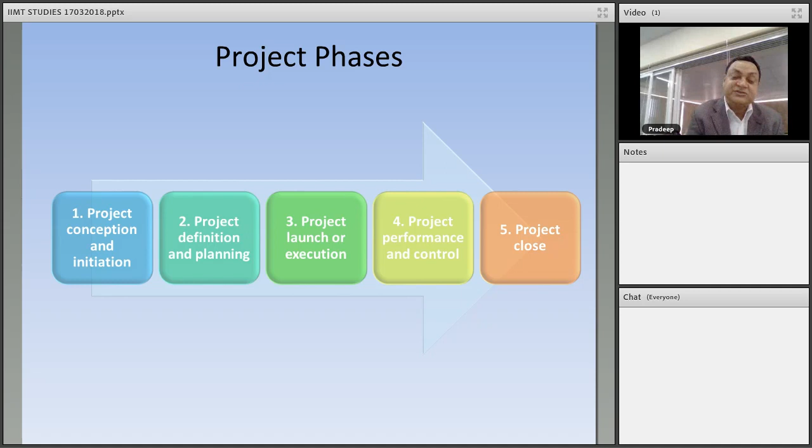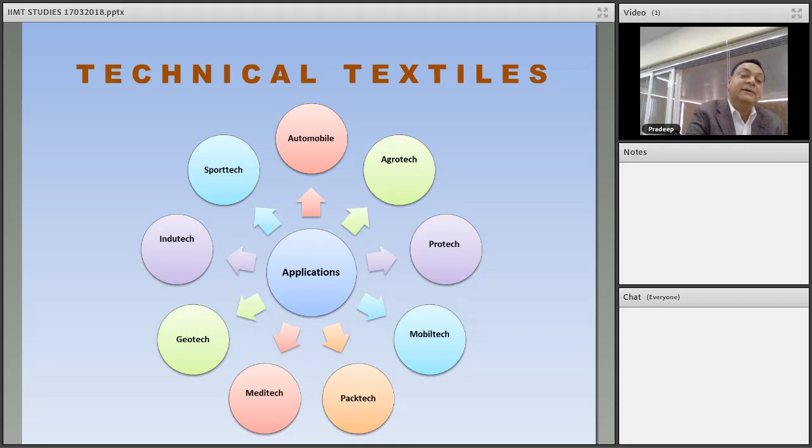Now I am coming to the subject of technical textiles. Basically, technical textiles has 12 segments, but the important segments with more demand are automobiles, agrotech, protech, mobiltech, then packtech, meditech, geotech, indutech, and sport tech. I will go in details on each one in the next slides.

If you see the automobile textile industry: auto hose fabric, automobile interior carpets, automotive airbags, car upholstery, car body, even bulletproofing of cars - everything comes under technical textiles. There is a lot of scope in this industry.

If you go on geotextiles, we can see geogrids, geomats, geomembranes, geonets, non-woven geotextiles. There are many items which are daily required in the construction of the geo industry, and they are rapidly used now, even in India, in mass quantity.

Then medical textiles - a lot of contribution from medical textiles. Suppose baby diaper, bandages, contact lenses, gauzes, gowns, incontinence diapers, masks. For mask, I am giving one example of an institute, Atira. Around 6-7 years back, swine flu fever came, and no mask was working properly, and the impact was much more of the swine fever. It even led to the death of people.

So Atira invented a mask guaranteed for 99.9% breathing, and it has worked very well. They distributed this mask free of cost for social welfare. So there is a lot of contribution in medical textiles.

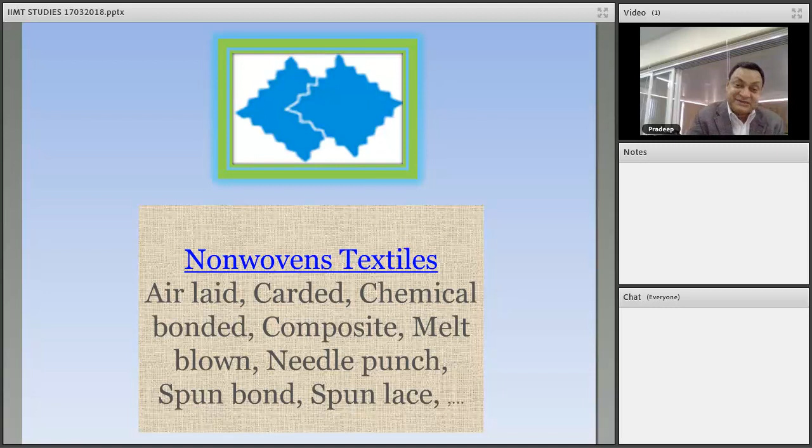But since this technical textile has come, there are some processes which I will show you in the next slides. The value addition on non-woven has been increased, and people are engaged for the whole year in the factory.

Now, if we go on Oeko-Tech textile, we have to see the industrial hazards, waste disposal products, the concept of green dustbin and blue dustbin. Other Oeko-Tech applications come under the Oeko-Tech industry.

Then agro textiles: agro bags, anti-hail nets which prevent crop damage, bale wrap nets, bale twine, bird protection nets, crop nets, fish linings - this comes under agro textiles. So you can say there are a lot of items which come under technical textiles. So one person has a lot of scope to start a business based on his attitude as well as requirement in a particular area.

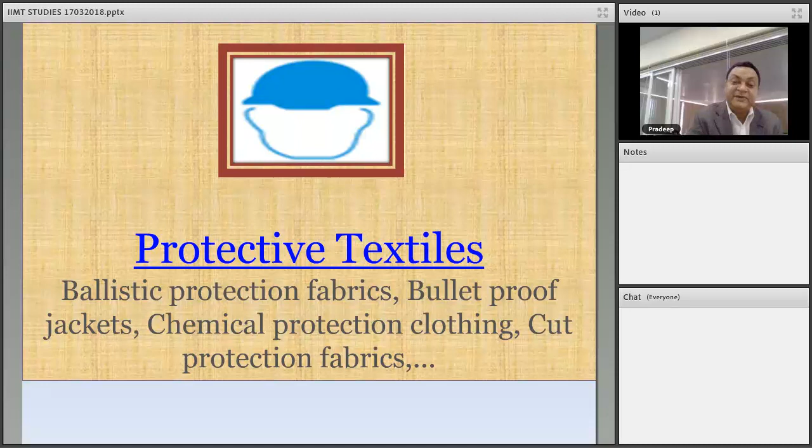Now, protective textiles - there is a tremendous contribution of protective textiles. You can see the chemical industry, defense, ballistic protection fabrics, bulletproof jackets, chemical protection clothing, cut protection fabrics. Suppose people are doing some cutting business with a knife - they have hand gloves so the organ cannot come in contact with the knife.

Then packaging textiles. As I told you with non-woven, packaging textiles saw a huge revolution with the introduction of lamination and coating. After lamination, we can give value addition to non-wovens. Then we can laminate them with BOPP, biaxially oriented polypropylene. Then we can print on it, and it will become export quality bags as per requirement.

Then clothing textiles - these are mostly narrow fabrics: elastic narrow fabrics, hook and loop, tape fasteners, interlinings, labels, sewing threads, shoe components. Here I want to add one thing - if we are talking about narrow fabric, it includes rope and belt.

Previously, ropes came in conventional form by just braiding - three or more fibers interlaced together, producing the braided rope. Now rope can be made by weaving also, with core and sheath arrangement. Core is the inside material and sheath is the outside material. Because of the core, strength of the rope can be ascertained, and because of the sheath, aesthetic property like handling of the rope can be ascertained. Suppose inside we put carbon, so strength comes because of carbon, and outside we put cotton, so we can hold it properly with naked hands, no problem.

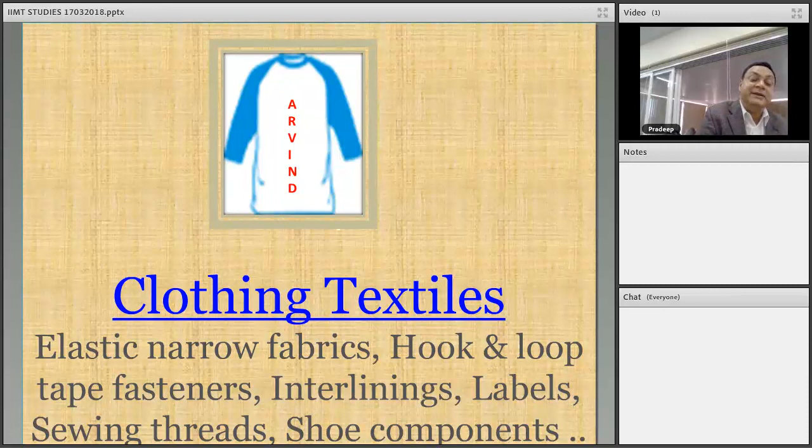So this is rope, then belt. There are several belts we are using - industrial belts, and there are woven belts also.

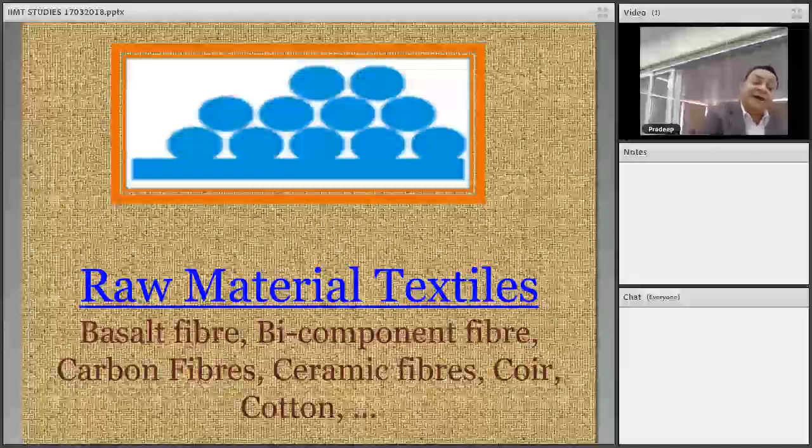Then raw material textiles - basalt fiber, bicomponent fiber, carbon fiber, ceramic, coir - these are raw material textiles. Then sport textiles - there is good contribution in the sport industry also: artificial turf, ballooning fabrics, boat covers, climbing ropes, as I told you before, paragliders, parachute fabrics, sail nets can be made by sport textiles.

Then building textiles - architectural membranes, awnings, canvas tarpaulins, concrete reinforcement. These are the main products and they are usually in production under technical textiles.

Then home tech textiles - carpet backing cloth, this lino cloth I will show in the next slides with polyester. Then curtain tapes, fiber filter fabrics for vacuum cleaners, furniture fabrics, etc. - we can make these in home tech textiles.

Industrial textiles include abrasive fabric like sandpaper, absorbent glass mats, battery separators, bolting cloth (a thick cloth that can hold and have bolts fitted for separation), and cigarette filters. Coating is also done by industrial textiles.

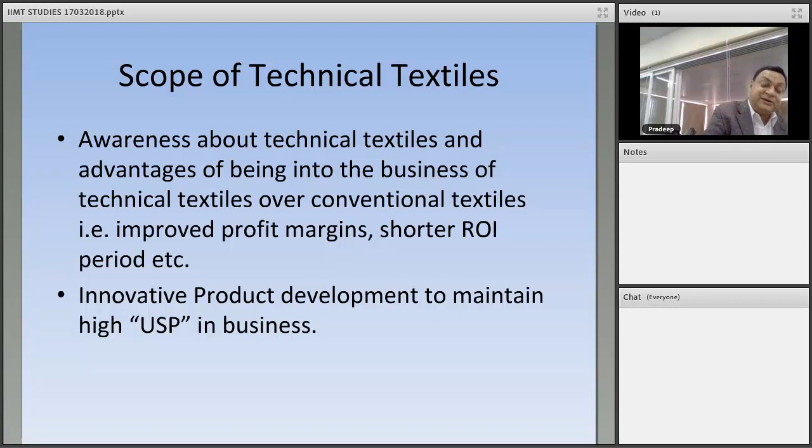Now let's see the scope of technical textiles. You've seen the list of products, but this is just a small sample; we can expand it much further. Technical textiles have much more scope, and depending on the requirements of a particular field, an entrepreneur can start a business. One can do this business discreetly and maintain a high unique selling proposition. If the USP is good, the profit margins are higher and ROI can be shorter. So this business is very effective and profitable.

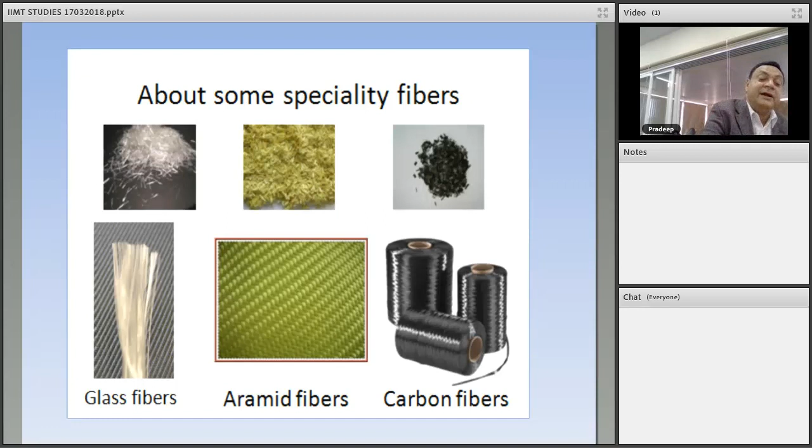Now, the basic yarns used in technical textiles are glass fiber, aramid fiber, carbon fiber, and their chips. Dyneema (aramid-type fibers) also come into use, but that is rare. Some companies making these are DSM, Teijin, and DuPont.

That was the description of the products. Now let's talk about technology. In textiles, there is a process of combining the warp yarn and weft yarn according to the fabric construction. There are eight weaving methods that can be used to generate technical textiles.

I will first talk about the names of the weft insertion methods, and then show the looms in the next slides.

One is projectile technology, where the weft yarn is transferred by steel projectiles. Then there is rapier technology, where the weft yarn is transported by giver and taker rapiers. This rapier may be flexible or rigid depending on the variety of fabric being produced.

Then there is water-jet loom technology, where the weft yarn travels by a jet of water—mostly used for making polyester. Then air-jet technology, where the weft yarn travels by a jet of air.

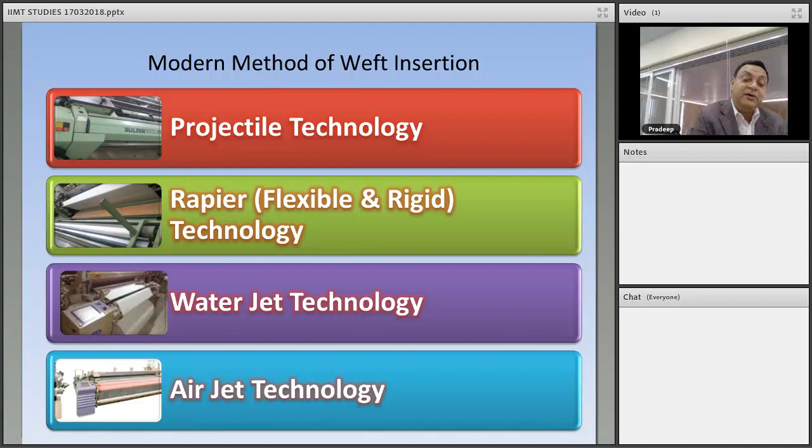Then multiphase weaving technology, which uses a circular type or flat weaving machine, where several sheds of warp and several wefts can be inserted. Then multi-axial weaving technology—multi-axial fabrics are required for strength, so we use multi-axial weaving for that.

Then further processes like lamination and coating, along with weaving machines and embroidery units. Everybody knows embroidery, and there is a lot of scope in embroidery and decorative fabrics.

Then needle weaving technology for narrow fabrics and ropes—these use narrow looms. There are some local, indigenous looms, but the main looms were initially made in Switzerland, such as the Jakob Müller belt narrow loom and the Jakob Müller rope narrow loom. With these, we can produce several types of ropes and belts.

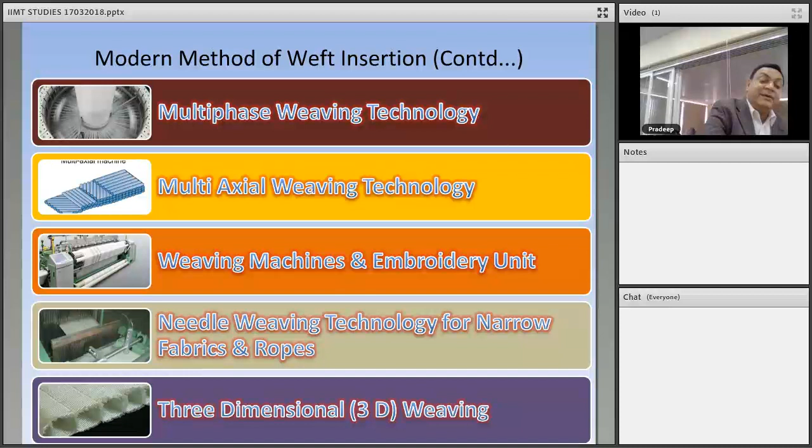Then there's three-dimensional (3D) weaving, which has a lot of significance and use, mainly in the automobile industry, aeronautics, and other industries.

Now let's look at the Sulzer picking mechanism, where the weft yarn is carried by a projectile. A projectile is made of a small cross-section of steel, 90 mm long, 14 mm wide, and 6 mm thick. Several projectiles travel through the shed carrying the weft yarn to make the fabric, and a shearing strain energy gives the force to the projectile so that picking takes place.

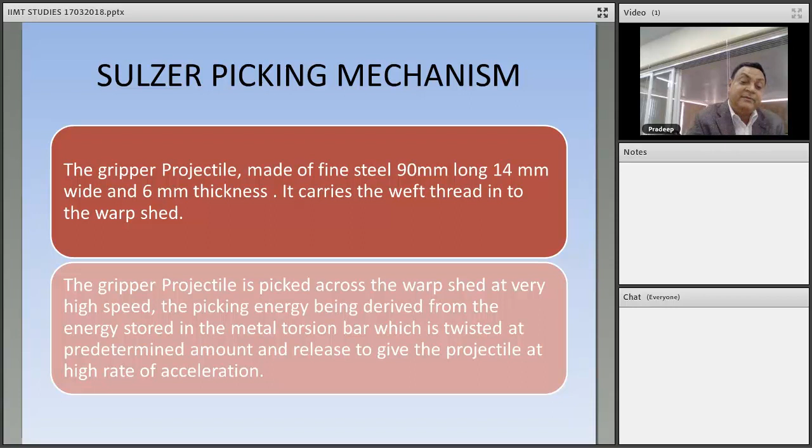This is a good mass production loom. Let me show you a weaving process on this: polypropylene ventilator fabric being woven on a Sulzer projectile weaving machine.

Shuttle looms were very good earlier, and even now they are still used. But since microprocessor-based control looms have come, we get more information, so shuttle looms are used less now. However, for particular segments like heavy fabric, we still use shuttle looms.

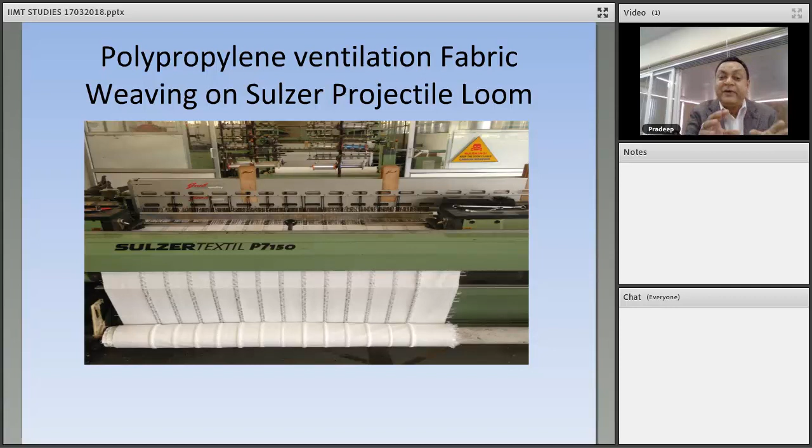Like you can see in this polypropylene ventilator fabric: here's the fabric, here's a slot, here's the fabric, here's another weft slot. So if you make a carry bag from this, it will be perforated. If you transport fish from one place to another, you can carry live fish in the fish industry. If you want to transport fresh vegetables like tomatoes or potatoes, putting them in this bag lets them get very good oxygen. That's the advantage of this ventilator fabric.

We can make many things like this, and mass production is required for such fabrics.

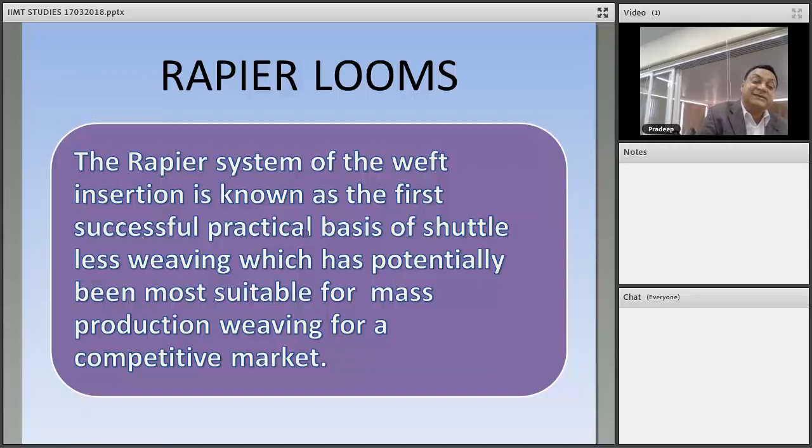Then rapier looms, as I told you. The rapier loom system is known as the first successful practical basis for mass production. This rapier is transferred by two grippers, one giver and one taker. The rapier runs from one side, brings the thread, gives it to the other, takes back, and beat up takes place. Consequently, fabric is produced according to design.

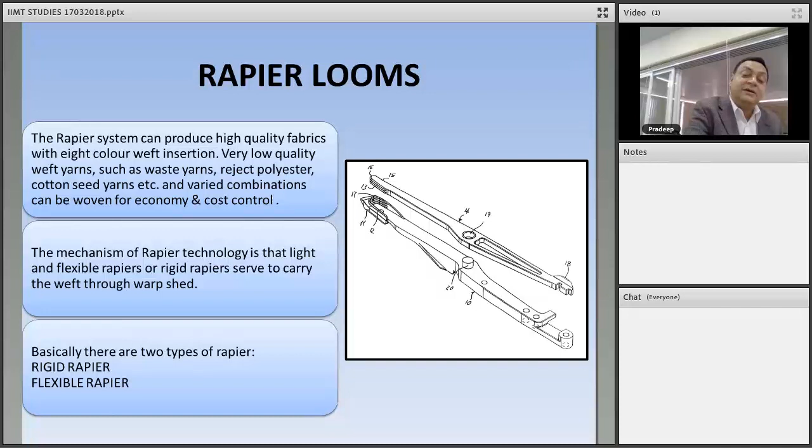What we feed in the dobby looms, or maybe in microprocessor methods like this, and jacquards. So the mechanism of the rapier is very easy and these looms are very productive, and mass production can be taken from these looms. Even any type of yarn, even waste yarn, can be run very smoothly by these looms. The demand for rapier looms is highest this time for technical textiles.

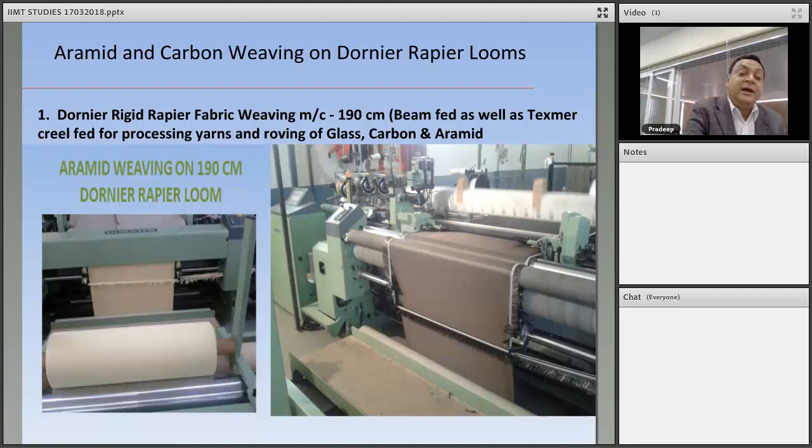Now I am showing you here the carbon weaving and aramid weaving on a rapier loom, Dornier rapier loom. On this loom we are making the carbon fabric. You can see here the special arrangement - there is no beam for carbon. Straight threads are coming and they are just making the fabric. And this carbon is very dangerous for the health of those producing it.

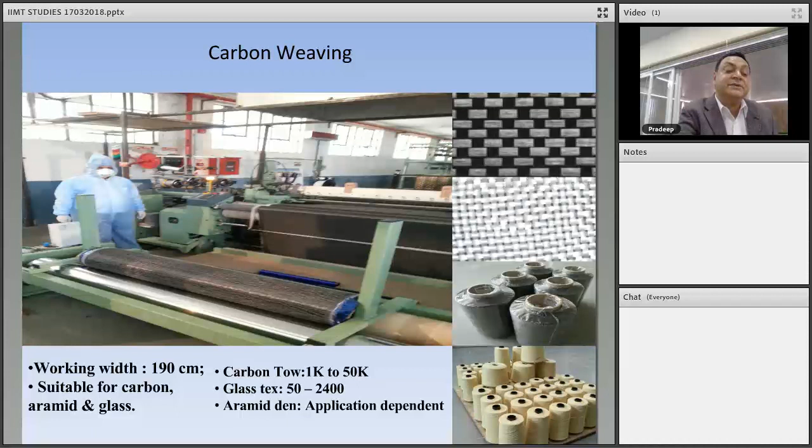I'll show you this in the next slide, then come back to this one. The person operating this machine wears protective dress so the carbon fibers should not touch their body. They even use a face mask, specs, gloves - everywhere is covered. So protection is very important.

And if you see this carbon weaving, here you see this particular tilted fabric being produced. This is called satin carbon fabric. This is useful for niche segments like aerospace aeroplane parts, tilted parts like the propeller of the aeroplane, where this type of fabric is used. This is costly carbon actually.

3K carbon, 6K carbon is the nomenclature. In other varieties of carbon, 24K, 50K carbon is used basically in the construction industry - I'll show you later in this slide. Then there is UD carbon and BD carbon. BD carbon is bidirectional carbon, meaning the yarn of vertical and horizontal, warp and weft, will go in equal ratio, or 60-40, or 70-30. While in UD carbon, strength comes from warp yarn, the longitudinal yarn only, and weft yarn is used just for interlacement. So weft yarn remains only around 10% and warp yarn is 90%, because weft yarn has no role in the strength - it's just making the fabric by insertion.

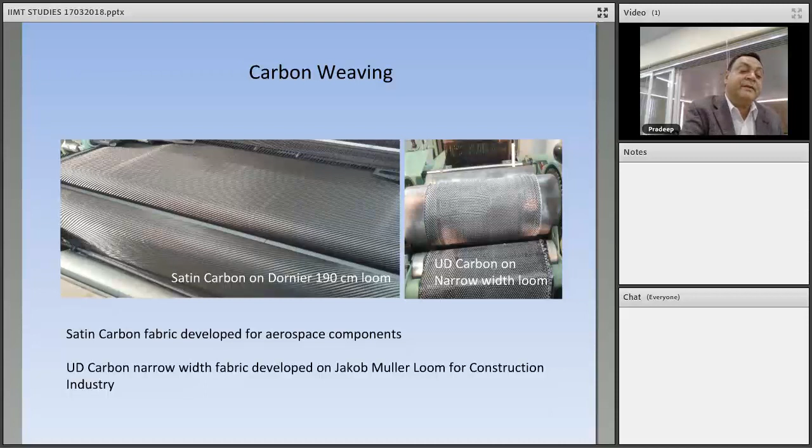I'll show you this in the application. This is a Jakob Muller weaving machine from Switzerland. This is a Dornier weaving machine of Germany. These are most widely used in the industry.

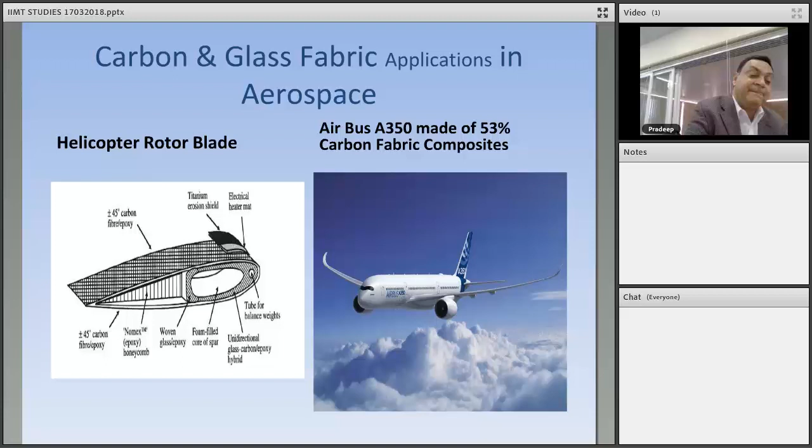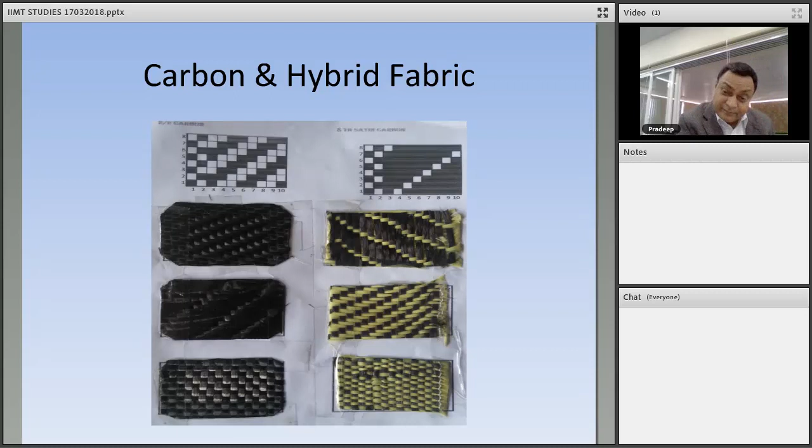Around 10 years back we were using square pillars. Now builders are making round pillars also. So these square pillars, with time, say 50, 60, 70 years, because of the load and compression, the extremities of the pillar just start damaging and coming out.

You can see, just imagine a building. If the building stands on 4 pillars, you can see on the extremities there are some injuries, materials coming out, and this building becomes risky. It may fall down anytime.

So without removing the total infrastructure, we can repair the pillars. How? This is a carbon fiber which we made on a narrow machine, the 24K, 50K carbon, not very costly. It comes around 2200 rupees per kg, like this price.

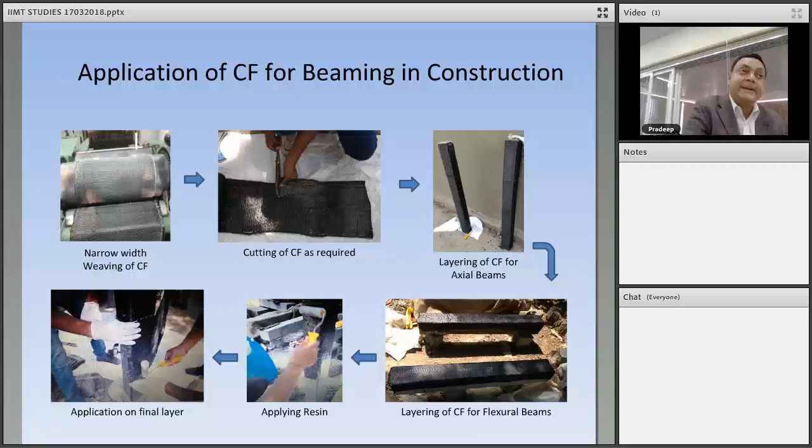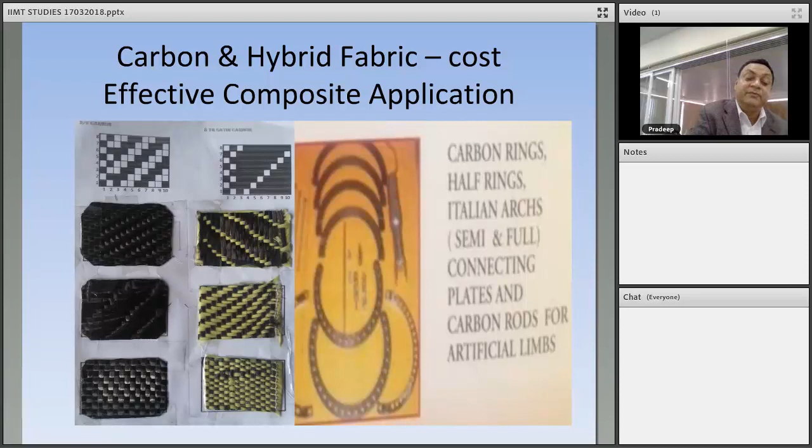We can make carbon rods for civil construction and artificial limbs in medical science. Carbon wearing is very less, abrasive very less. So it is now adopted firstly in medical technology also, mainly for artificial limbs. They are making it. So this is a good contribution of carbon technology in the medical field.

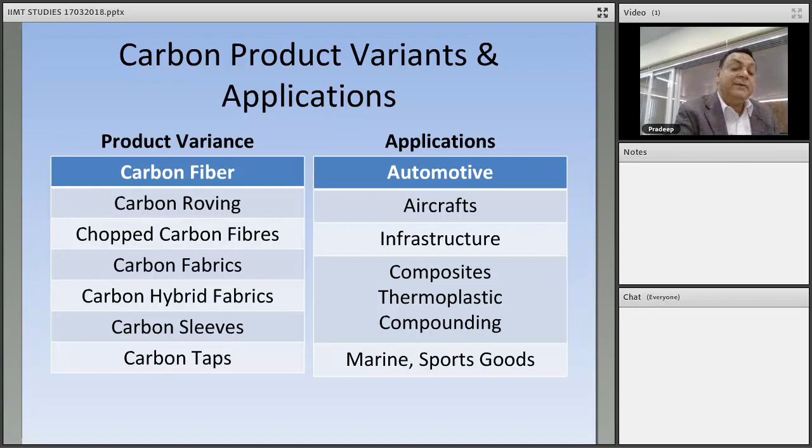There's a lot of scope there. These are some very small examples I am giving you. This is a very vast field actually, and we have a lot of applications of these things. Even research is in progress, on how we can make more utilization of this technology in future.

Now I'm coming to glass fiber. As I told you, carbon, glass and aramid in the beginning. Again, we are taking the Dornier loom of Germany. Now you are seeing here two types of fabric: one is fabric-like fabric, the other is perforated fabric. So this fabric, suppose we are making PPGL, polypropylene and glass blend.

Then you see here, this is leno fabric. If we talk about leno fabric, the perforated fabric: 10mm by 10mm leno, 8mm by 8mm leno, or we can have 6mm by 6mm leno. These are symmetrical shapes. Even you can take 6mm by 10mm leno, 6mm by 12mm leno, asymmetrical shapes in polyester or glass.

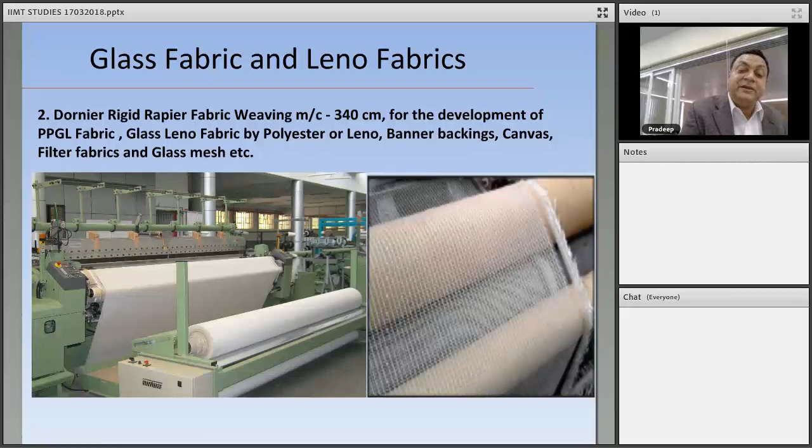Even in Uttarakhand and the northeast, the roads were totally deforming during the rainy seasons. Now they put this fabric, polypropylene fabric, leno fabrics, so now roads are stable. So in the construction industry and even the bridge industry, there is a lot of scope for this leno fabric, glass fabric.

So this is very important: how to select the machine for a particular task, and what are the future prospects of the business.

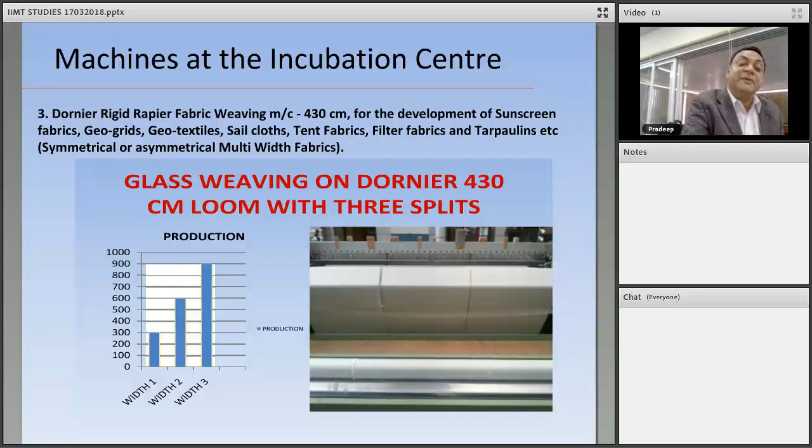Now, lamination and coating machine. Lamination is a process adopted since 1800 BC. If you see that time, with mummies, they were preserving dead bodies - that was one type of lamination or coating. Many people have been using this, but nobody knew the much importance of it. But in the last 20-30 years, this has been adopted very quickly.

It's used for preserving things, giving strength, and giving value addition to material - like automobile textiles, protective textiles, bulletproof fabrics, bulletproof jackets for military and police, medical textiles, aprons that should not catch germs. Suppose they make polyviscose fabric and put coating on it so germs don't come into the intensive care unit. Then industrial textiles, sport textiles, fashionable wears - suppose there is denim fabric, they can join two denim fabrics to give a fancy effect and make a coat. Then home furnishing fabrics.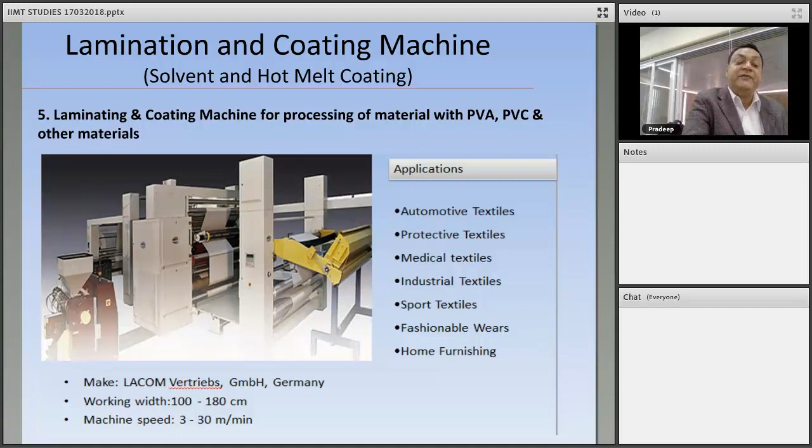Now this is the preform for bulletproofing jackets. Preform means this is the initial material for a final object. Suppose I have to make one preform for a bulletproof car - I'm giving the example just roughly.

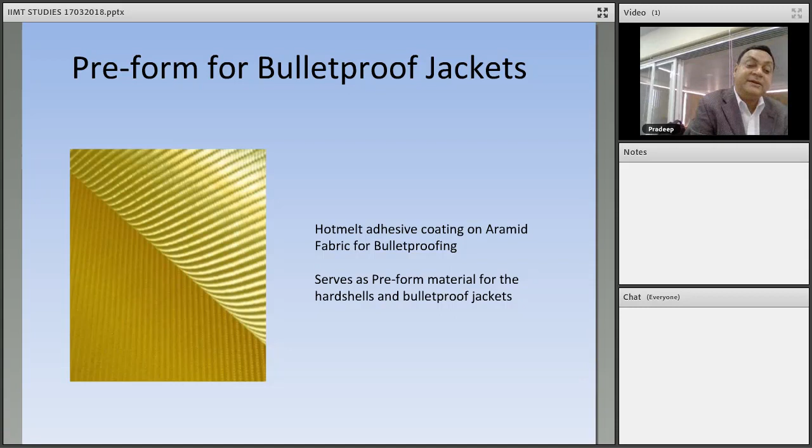So this bulletproof car material is very costly. They take a biaxial aramid fabric and put AOPP coating on both sides, 50-50 gram. Then they send this fabric to the forensic laboratory. For a requirement of, say, 6 bullets, they shoot from a particular distance with a particular size gun, 6 times fire. If it doesn't show any hole or impact on the fabric, it's passed - otherwise it's not passed. So making this fabric is not easy, and it should be 100% foolproof before giving it to the user. This technology is slightly complicated, but we use it even in India.

Now you see a very easy technology - non-woven fabric. There was a time when the scope of non-woven fabric was gone and people were afraid to bring non-woven machines. But now, since this value addition concept of non-woven has come, we are increasing production in this industry.

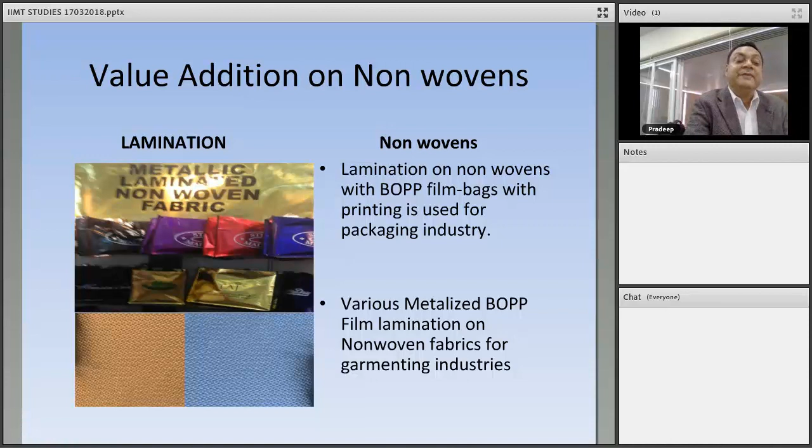Suppose this is an example: we take just fabric, we take the film - golden color, silver color - we laminate it, then do printing. We can make very good poly bags, even export quality bags people are making in India. So this is the application.

Now I was talking about weaving. Now I am coming to braiding technology, because technical textiles are possible by weaving, braiding, knitting, and non-woven - 4 things. Weaving and non-woven I have covered. So if you have any question, you can type here, or after this presentation we will be comfortable to solve any questions.

Let me continue with the application of braiding technology. I defined braiding earlier. The demand for different technical braids keeps pace with technical progress. The medical industry, automotive industry, aeronautic industry, even satellites and space application centers - they all require braided fabric, because knitted and braided fabric has more strength than weaving. Suppose one person makes perforated fabric, which I told you earlier - leno fabric, on weaving - it can be used on tiles or road bridges for giving strength to the bridge.

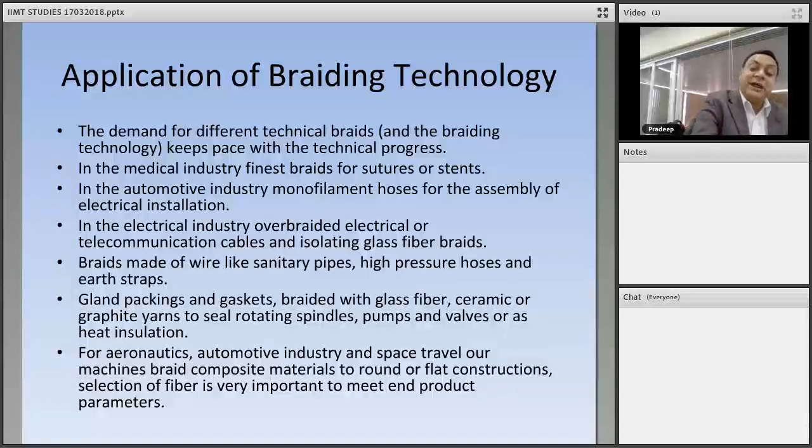In automotive industry, monofilament hoses are used for the assembly of electrical installations, the electrical industry, overbraid electrical and telecommunication cables, isolating cables, and fiber braids - these are the main applications. Then there's gland packing gaskets, braids in glass fiber, ceramics, and graphite, then aeronautics and automobiles. All of these require this braiding technology. Braiding is a very complicated technology, not easy actually.

I will show you one machine, installed for the first time in India by Atira, Ahmedabad. This is a robotic radial braiding machine. Now if you see here, these are the small carbon bobbins, a lot of bobbins, and here are the glass bobbins. They have to make the hybrid fabric of glass and carbon.

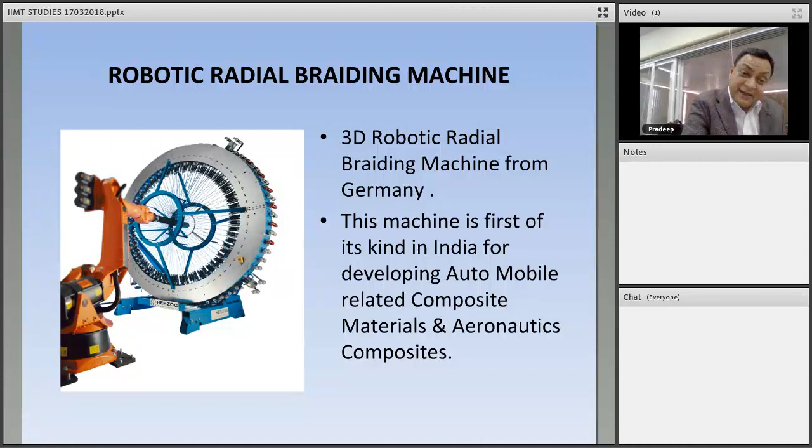Now this machine is operated by a robot, not by men, because there are multiple functions in a cycle, so men can be injured. So the robot is doing all of this, programmed. We are just feeding the requirement into the robot, and now it is making this final product for composite applications, and the robot is doing the work. We are just watching from outside through the glass frames. So this is a robotic braiding machine making three-dimensional fabrics for composite applications.

Application of knitted fabric, as I told you, they are very cost effective - like flexible banners, you can see everywhere: standees, banners, advertisements, in the picture industry, film, cinema, institutes, and many applications, exhibitions - we are seeing banners. The flexible banner revolution has come with knitting actually. With knitted fabric, they do lamination and printing on it. The flexible banners are very cost effective and give a very good glorious matte effect. So these are very much in demand.

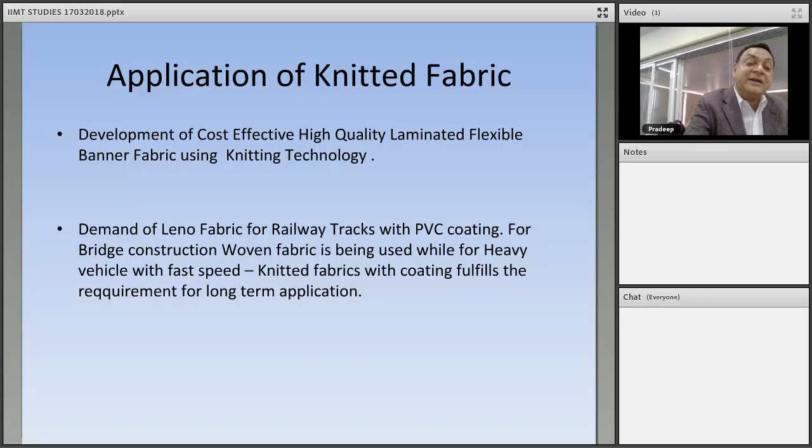Now there's demand for leno fabric for railway tracks. As I told you, for the bullet train, woven fabric with PVC coating for bridge construction is being used with heavy vehicles at fast speed. So this is the requirement. China is using this because China has the highest speed train in the world, which runs at 420 km per hour. This magnetic train has taken this technology and adopted this knitted path of coating.

Then I'm talking about rope. Rope is the narrow loom woven technology or braid technology. Now you can see the rope here. What happens - when we talk about rope, we just think about commercial rope, like one bucket pulled by rope from a well, or rope we use in daily use. No - like climbing, like military use, climbing a mountain, then for defense purposes, then the marine industry on ships. We are using very dynamic ropes actually.

They should not be affected by water, they should not be affected by other atmospheric conditions, and they should be very strong. So to make them stronger, suppose inside we use glass material, and outside we keep polyester, so we can hold it very smoothly, but inside is a very strong material. Then if we want it more stronger, we can put a bit of carbon. If we want even more strength, we can put Dyneema yarn - the highest strength yarn in the world, spectra yarn. So these are the yarns we use to make technical ropes, and this work is under progress actually. People are working on that.

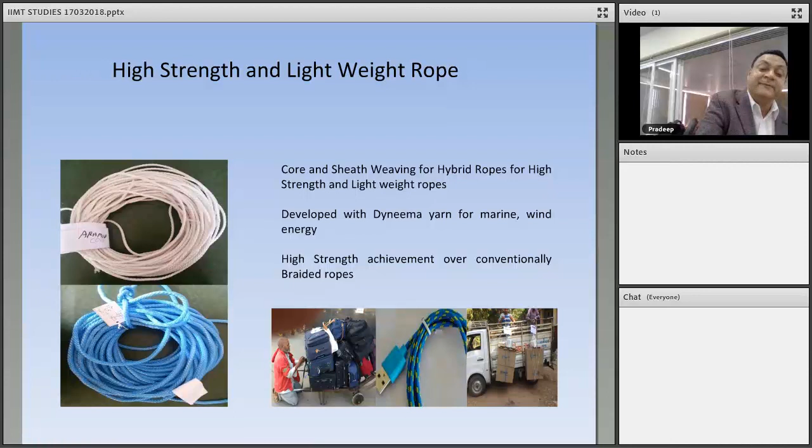Then for communication cables, like USB cords or any cords, we use this technology.

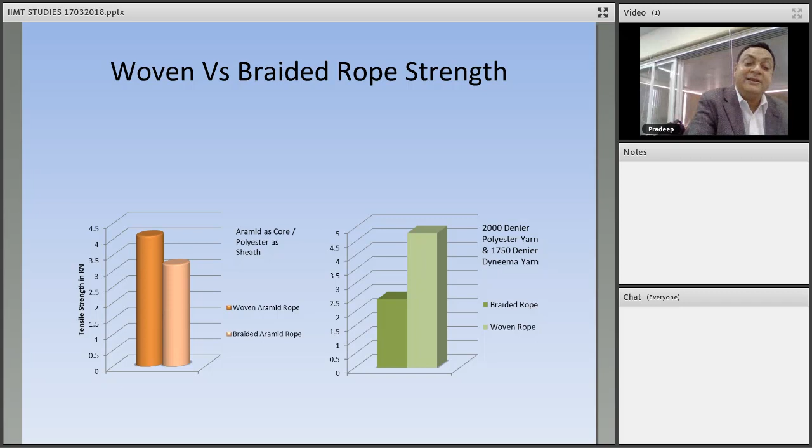Now if we see woven versus braided rope strength from a research point of view, what we found is that woven ropes are always higher in strength than braided ropes. How did we estimate this? We took the same number of threads, same material, same diameter of rope made from aramid, and rope made from other material - glass, carbon, other materials. So we compared braided and woven for glass, using machines installed in the US, which gave their breaking strength. What we found is that in a particular segment, woven rope is always very high in strength - here you can see woven rope is just double its strength. It's the same dimension, same specifications, same material, but the woven gives double the strength while the braided gives less strength.

Then you see the belt. If we talk about the belt, it's a highly adopted thing on the machines even - V belts, then flat belts, then other types of timing belts.

Now with technical textiles, these are things which are making progress, but more than that, we are going with high temperature belts. Suppose we have a woven aramid belt on a loom or narrow loom, as I told you. Then we give a particular chemical coating or particular GSM, so it can sustain 350 degrees centigrade to 1600 degrees centigrade temperature.

Just imagine there is a fire in a building or in a hospital, and nothing can work. These belts, we can put in the fire and they will not deform. Even fire blankets are there, which will safely protect the person without injury. So these are very good things.

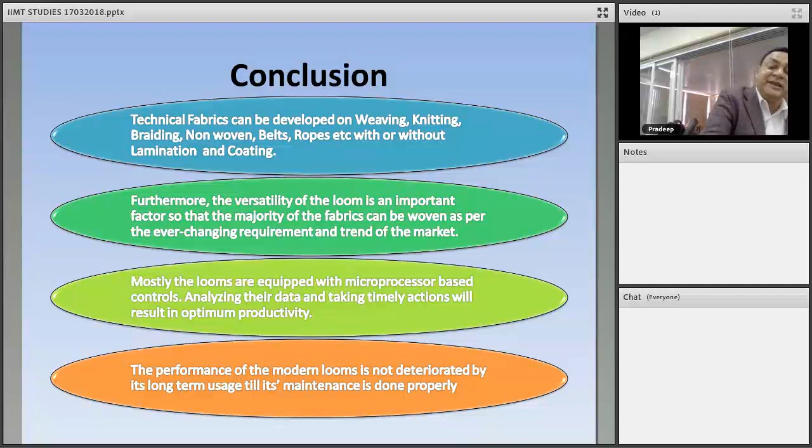A new machine, if we do not maintain it, will deform and give poor quality. And a very old machine, even 40 years old, if an entrepreneur installs it as a second-hand used machine, no problem - if we maintain them properly by lubrication, settings, oil, grease, everything, handling, I can say 95% to 99% efficiency is possible on old machines.